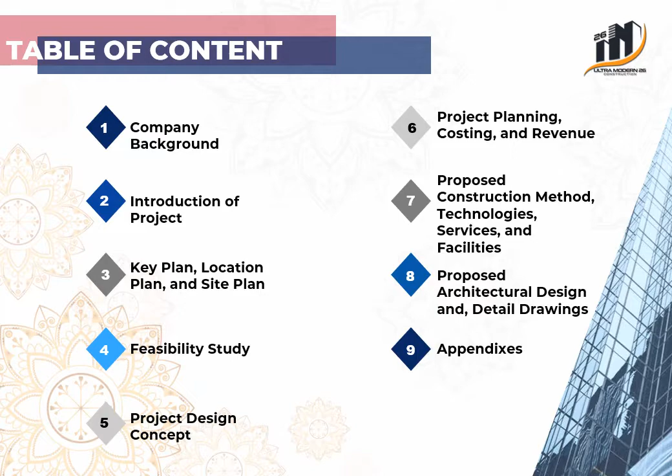The year 2022 was a beginning journey, making a new step further into getting involved in big construction industry, focusing on building and civil works. With dedicated and innovative employees hired, Ultra Modern 26 Construction Sendirian Berhad became one of the major names among Bumiputera contractors in Seri Iskandar, Perak.

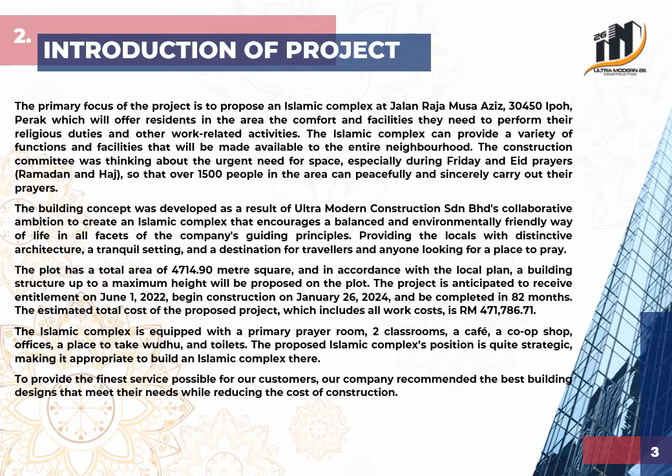These are the key plan and location plan, followed by the site plan.

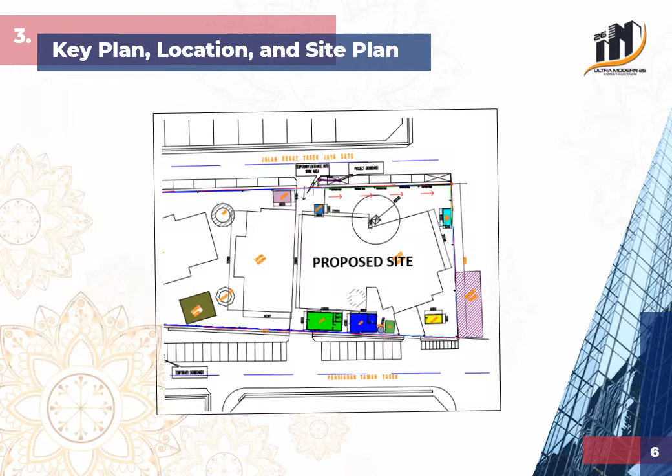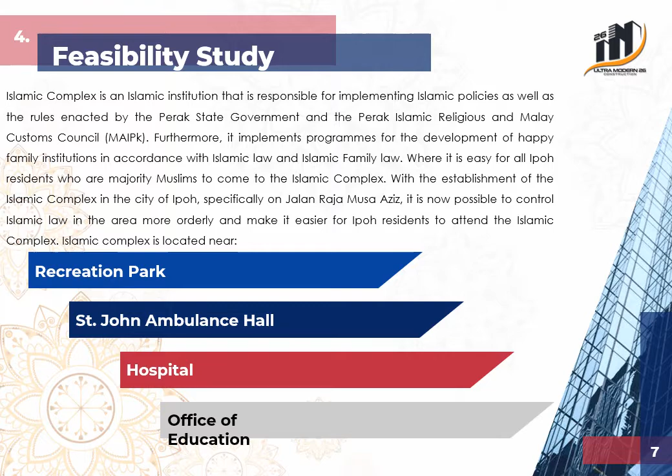Feasibility studies. The Islamic complex is located near a recreation park, St. John Ambulance Hall, a hospital, and the Office of Education.

Project design concept. The design concept that we decided to go with for this Islamic complex is modern traditional concept, Islamic, modern, and traditional. Modern traditional inspires a sense of gathering in a casual way. This mix of traditional and modern design uses the design of a mosque in Malaysia as the main motif.

This design strives to be eye-catching to both locals and foreigners alike. Thus, a mix of the two concepts were implemented.

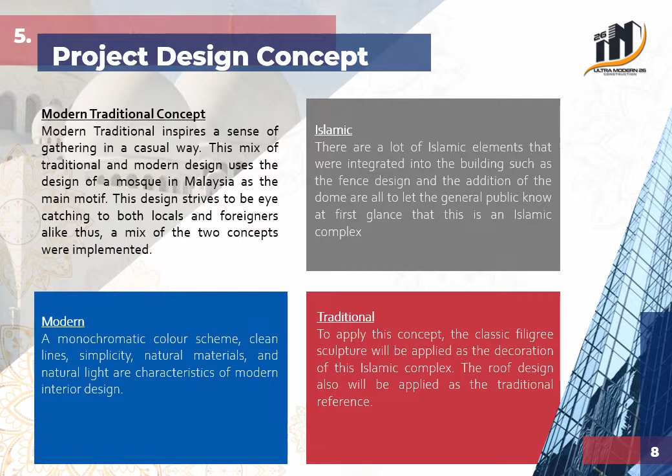Project design planning, costing, and revenue. These are the summary of project costs, and these are the revenue. Here we can see the estimated revenue in a month, in a year, and for the 10 years to come.

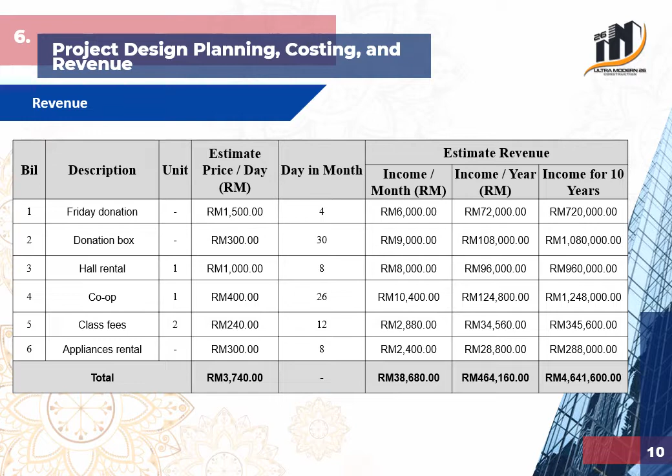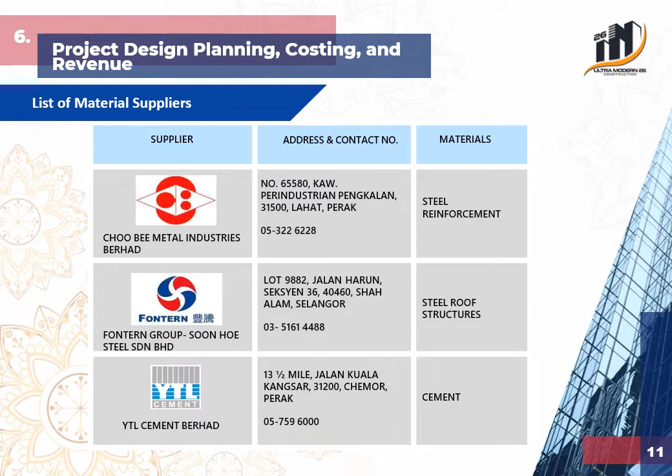After the revenue, we move on to the list of material suppliers. In this table, we can see the supplier, the address and contact number, as well as the materials that were supplied.

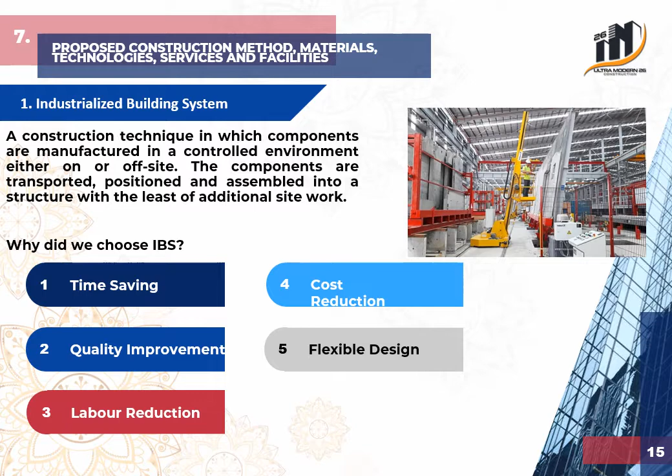The proposed construction method, materials, technologies, services, and facilities. We will first talk about the method and technologies. The method and technologies used to build this Islamic complex are the Industrialized Building System, or IBS for short. We chose IBS because it is time-saving, it improves quality, reduces labor, reduces cost, and it has a flexible design.

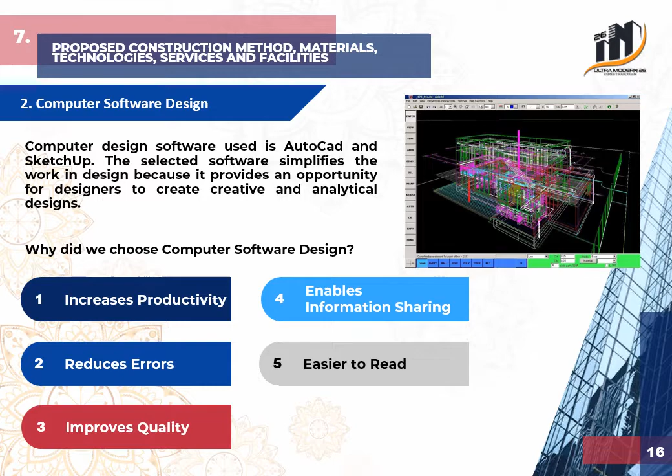Second is computer software design. The softwares used are AutoCAD and SketchUp. We decided to use computer software design because it increases productivity, reduces errors, improves quality, enables information sharing, and is easier to read.

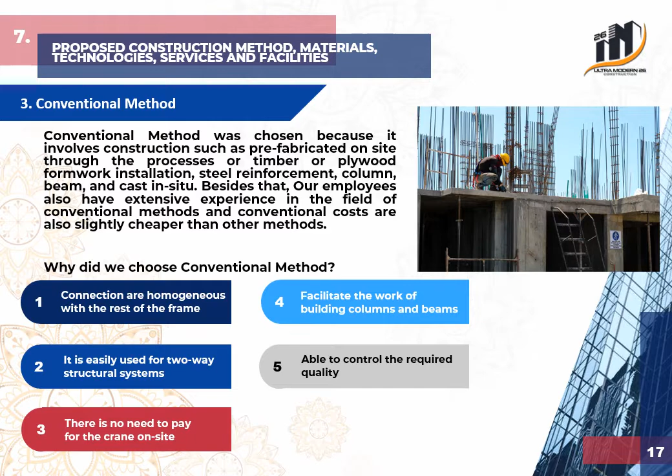Conventional method. We chose the conventional method because the connections are homogeneous with the rest of the frame. It is easily used for two-way structural systems. There is no need to pay for a crane on site, it facilitates the work of building columns and beams, and is able to control the required quality.

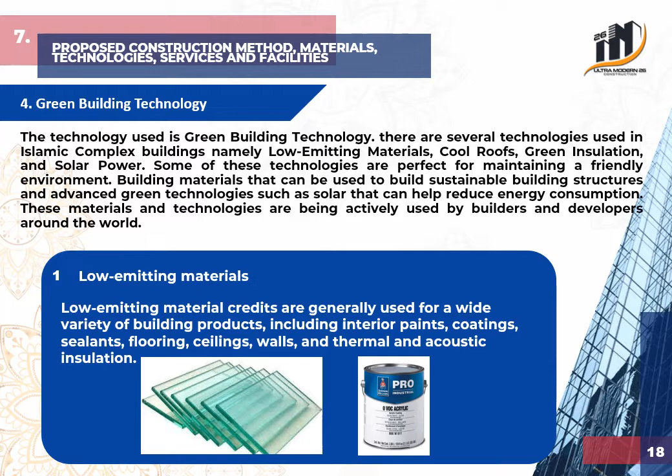The technology used is green building technology. There are several technologies used in Islamic complex buildings, namely low-emitting materials, cool roofs, green insulation, and solar power.

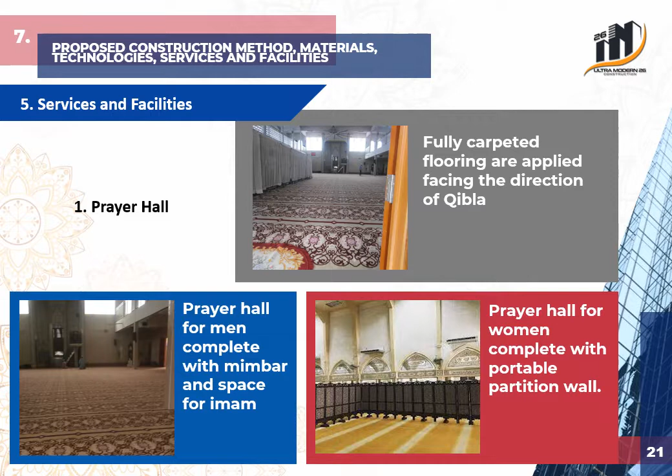Services and facilities. In the Islamic complex, there will be a fully carpeted prayer hall complete with a mimbar and a space for the imam, as well as a portable partition wall to separate the men and the women.

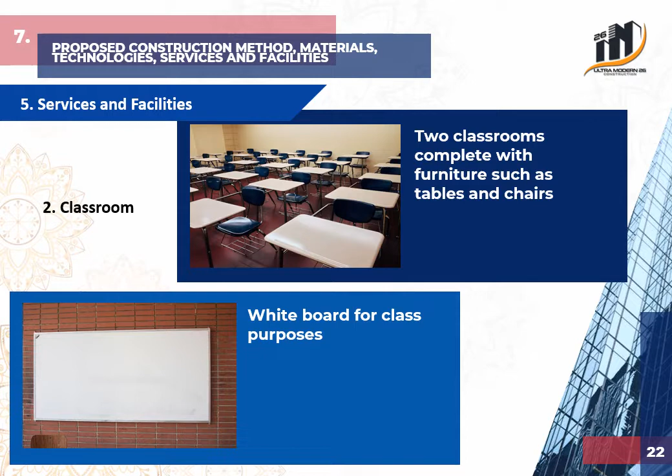There will be 2 classrooms complete with furniture such as tables and chairs, as well as a whiteboard for class purposes. There will also be 3 offices inside the building.

First is the director's office, assistant director's office, and the staff's office. There will also be a meeting room complete with furniture such as tables and chairs, as well as a PA system for meeting purposes. There is also a wudu area, prepared with seats to take wudu for those who have mobility issues.

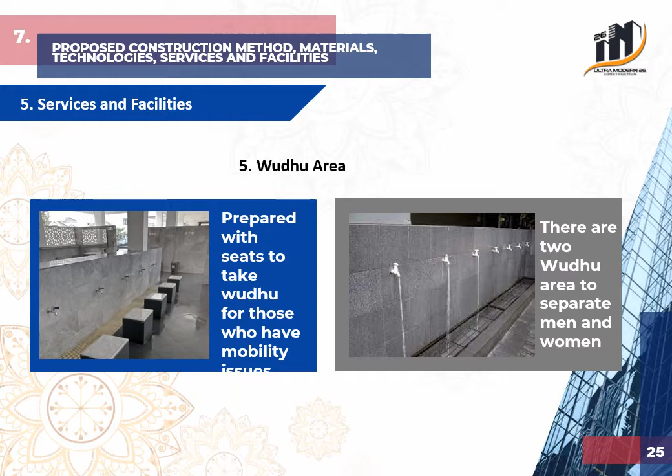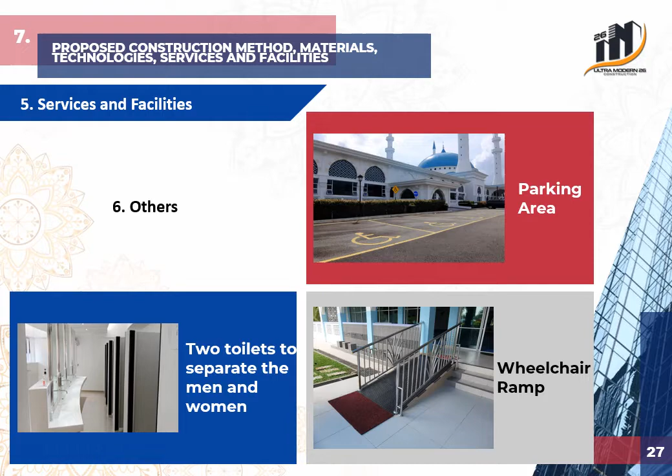The wudu area is separated for the men and the women. Besides that, there is also a co-op, cafe, multipurpose hall, and 2 toilets that separate the men and the women. Outside of the Islamic complex, there is a parking area and a wheelchair ramp.

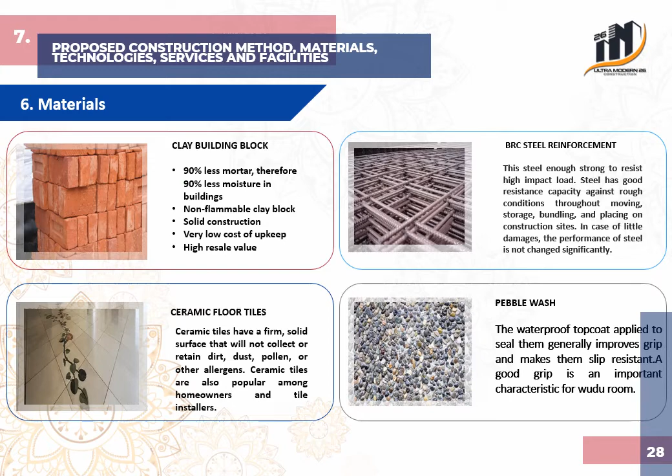We will now talk about the materials. The materials used for these buildings are clay building block, BRC steel reinforcement, ceramic floor tiles, pebble wash, Portland cement, stainless steel pipe, damp-proof membrane, and ceiling plaster.

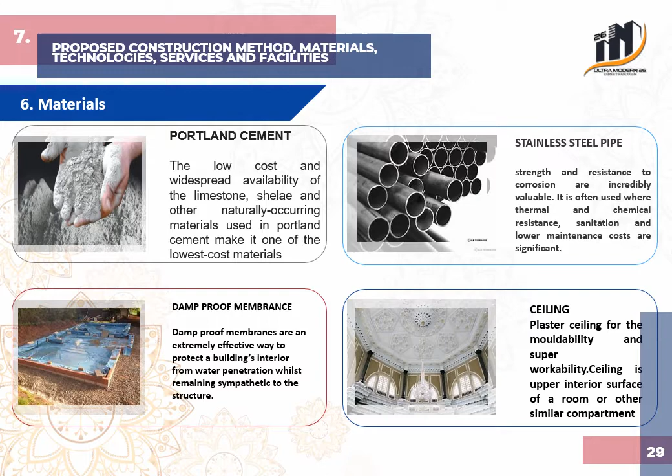Proposed architectural design and detailed drawings. These are the ground plan, first floor plan, the roof plan, front elevation, rear elevation, left and right elevation. Finally, the appendixes which show all of our certificates.